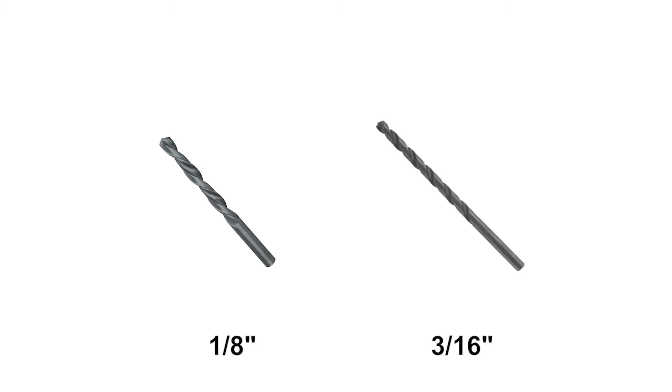and 3/16 inch drill bits, 3/16 inch hex wrench included with cable kits, cable gripping tool, optional, cable cutting tool, optional, cable release tool, optional, threading tool, optional, 90-degree threading tool, optional. Kits and parts for assembly:

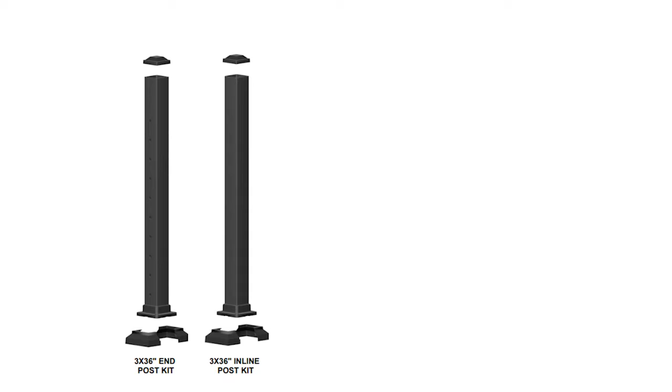3x36-inch end post, 3x36-inch inline post, 3x36-inch corner post, 3x42-inch inline stair post, 3x42-inch end stair post. Each post kit includes an aluminum post tube with attached base plate, post cap, and 2-piece base plate cover and an install guide.

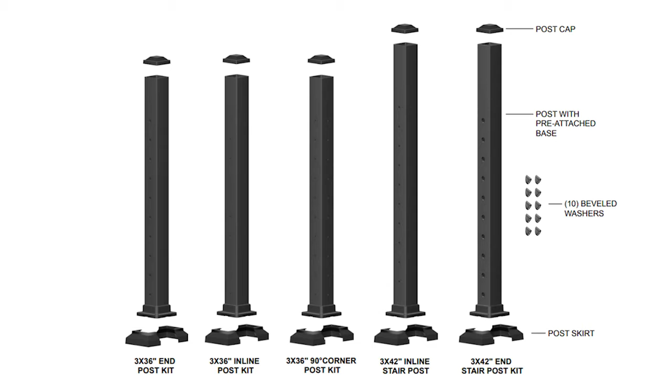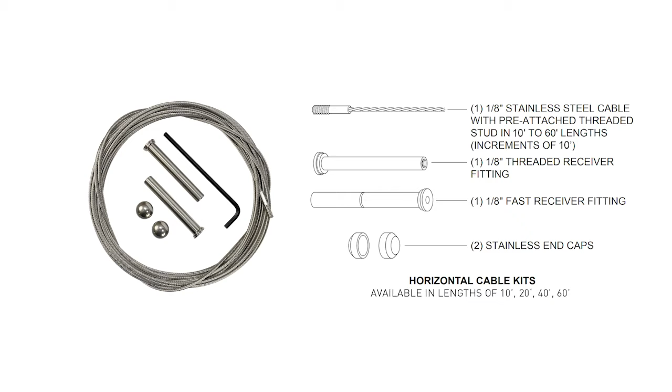3x42-inch end stair post kit includes 10 beveled washers, 1 1/8-inch stainless steel cable with pre-attached threaded stud, 1 1/8-inch threaded receiver fitting, 1 1/8-inch fast receiver fitting, 2 stainless end caps.

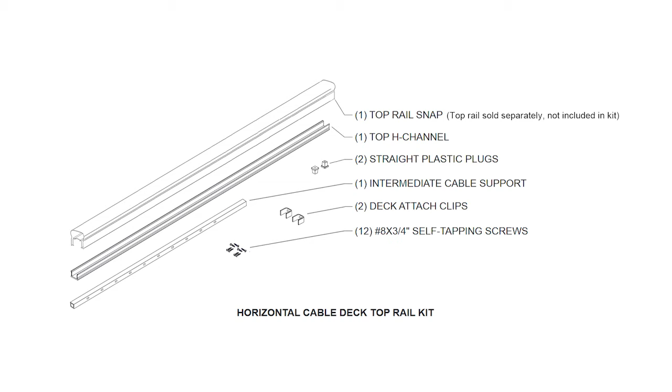Horizontal cable deck top rail kit: 1 top rail snap, 1 top H channel, 2 straight plastic plugs, 1 intermediate cable support, 2 deck attach clips, 12 number 8 by 3/4 inch self-tapping screws. Important notes: do not install base plate covers until railing assembly is completed.

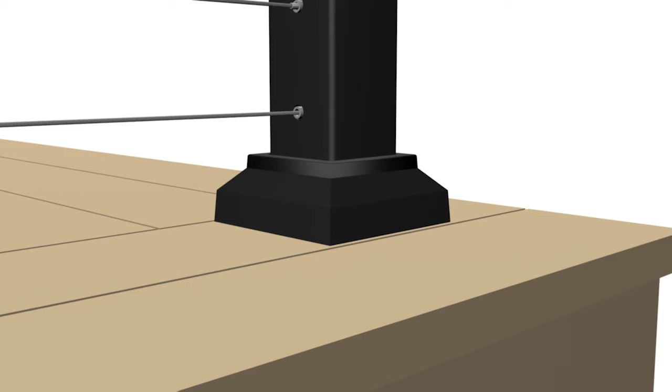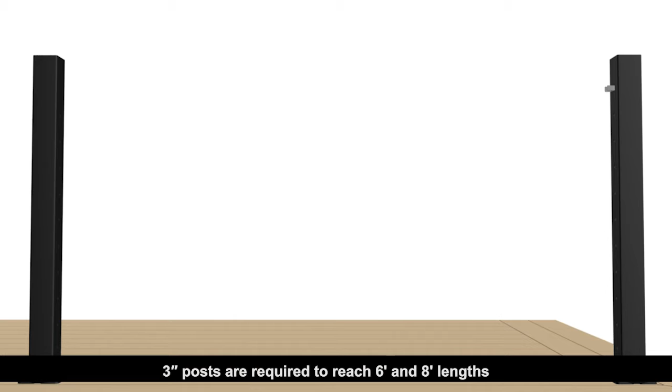Actual cable panel lengths: 69.43 inches and 91.31 inches. 3-inch posts are required to reach 6-foot and 8-foot lengths. Caution: if installing lighting, wiring must be installed prior to securing posts to deck surface and installing top rail snaps.

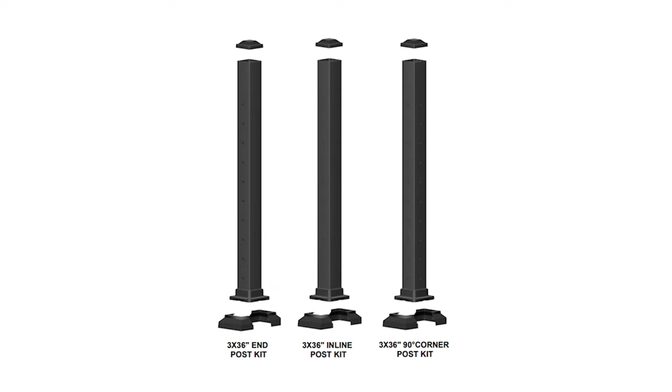Let's get started. First, we'll plan out and install the 3-inch aluminum posts. Determine necessary posts required: end, inline, or corner. Note: for structural integrity and proper installation, it is critical to use the correct railing posts in all locations. Corner posts are required for all 90-degree corners, and inline posts are required for all 45-degree corners.

42-inch stair posts are required for stair applications. Plan ahead for cables up to 60 feet in length and install end posts at the appropriate locations. Important: for 90-degree corner post applications, prior to installing rail attachment clips, ensure plastic plugs are installed in 2 pre-drilled hole locations. Leave plastic plugs in place until threading cable through corner posts.

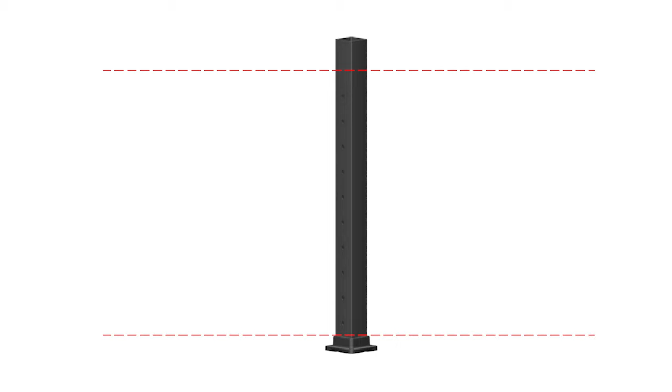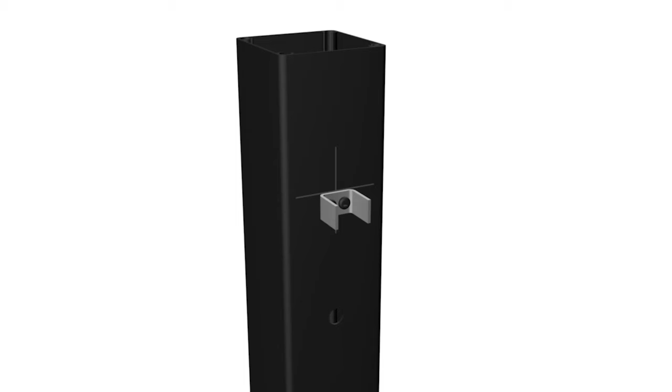Measure from the top of the base plate upper shoulder. Place a horizontal pencil mark at 33 3/8 inches for 36-inch rail height. Next, measure the center of the 3-inch posts and place a vertical mark at center of post. Install 1 upper attach clip per opening. Center 1 upper clip on pencil line. Secure attach clip with 2 number 8 by 3/4 inch self-tapping screws. Important: only install 1 upper clip per opening.

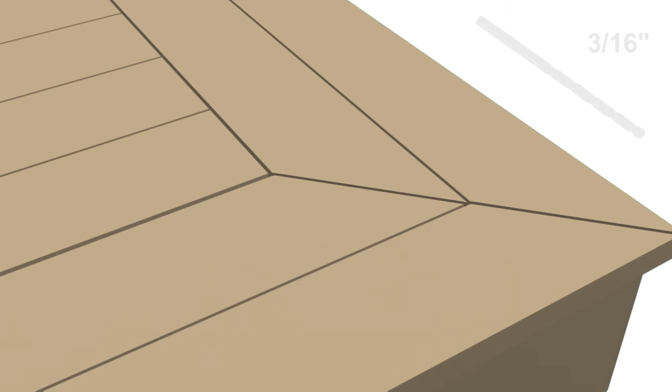Install proper post blocking. Use proper attachment screws or anchors as directed. Deck screws at each post location are not included with post kits. With 3/16 inch drill bit, pre-drill through deck boards and into blocking. Drill a 5/8 inch hole in center of 4 deck screw holes for lighting wires, optional. Level and plumb post using shims. Secure posts to deck with suggested screws.

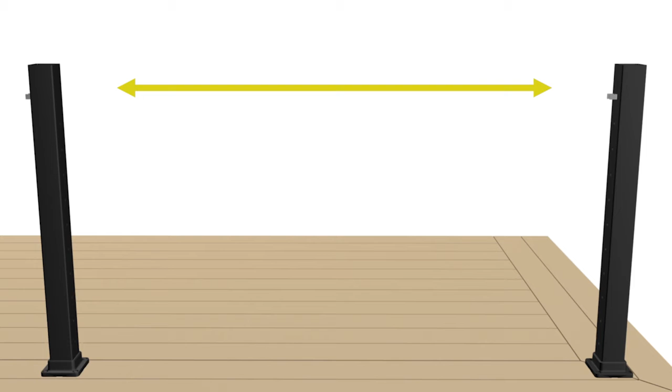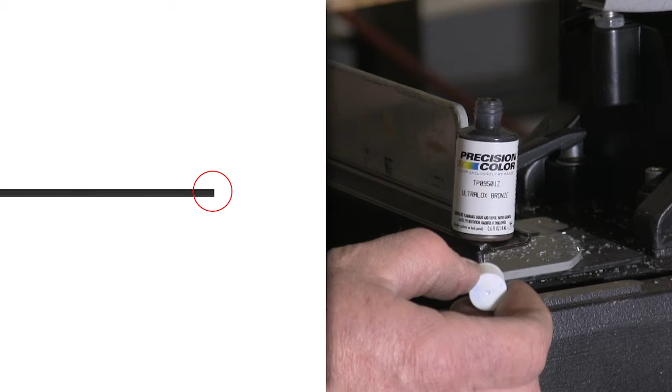Deck installation without bottom rail. Use only deck stair-top frame kits. Measure openings between posts and cut 1 U-channel per opening. Cut 1/16 inch less than opening size. Clean cut areas and apply touch-up paint on exposed ends. Measure and mark the center of top U-channel. Drill 1/8 inch hole in the center of top U-channel.

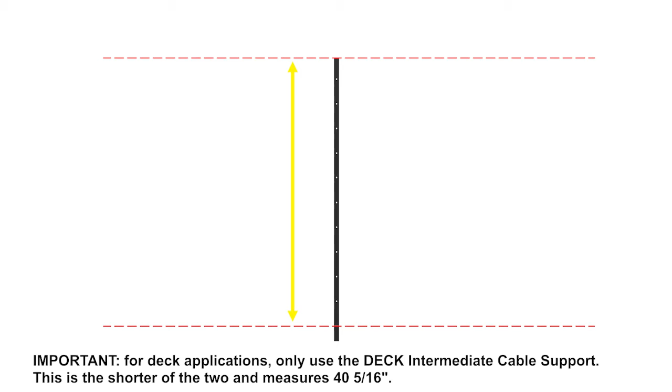Attach 3/4 inch by 3/4 inch plastic plug to the flat side of upper U-channel with one number 8 by 3/4 inch self-tapping screw. For 36 inch height railing, cut cable support to 34 inches. Important: only cut from bottom end of support, which can be identified by a longer section without a cable hole. Verify alignment of cable holes with posts before cutting.

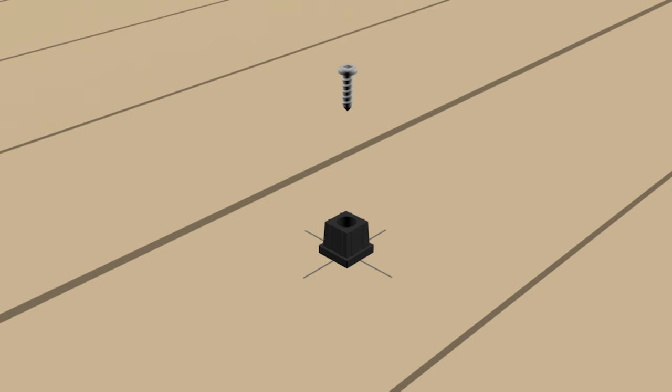Measure between posts and mark center point on deck surface. Attach 3/4 inch by 3/4 inch plastic plug to the deck surface with one number 8 by 3/4 inch self-tapping screw. Insert 3/4 inch by 3/4 inch intermediate cable support onto plastic plug, which is attached to deck surface. Then attach upper U-channel by inserting attached plastic plug. Again, verify alignment of cable holes with posts.

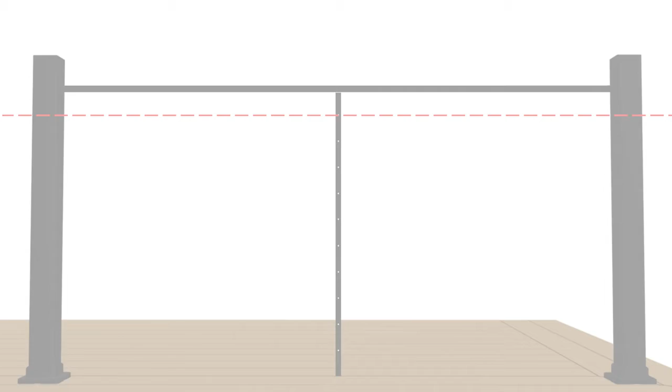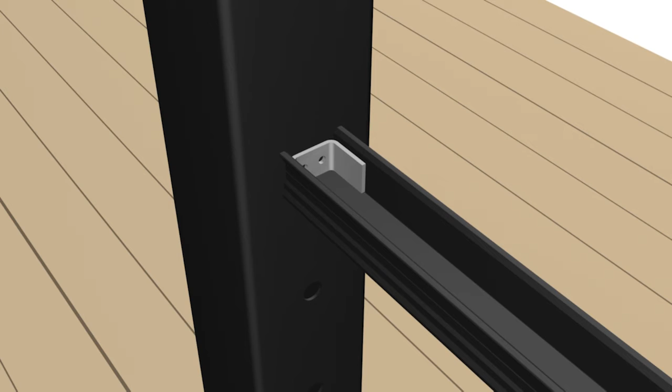Secure one end of U-channel to pre-installed upper channel clip with two number 8 by 3/4 inch self-tapping screws. At opposite end of U-channel, insert rail clip into U-channel. Align top edge of rail clip against prescribed pencil line. Attach rail clip using 4 number 8 by 3/4 inch self-tapping screws. Clamp or hold the top snap against posts and mark for cutting.

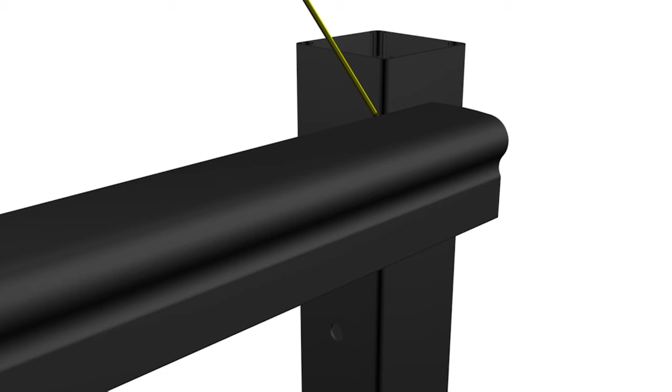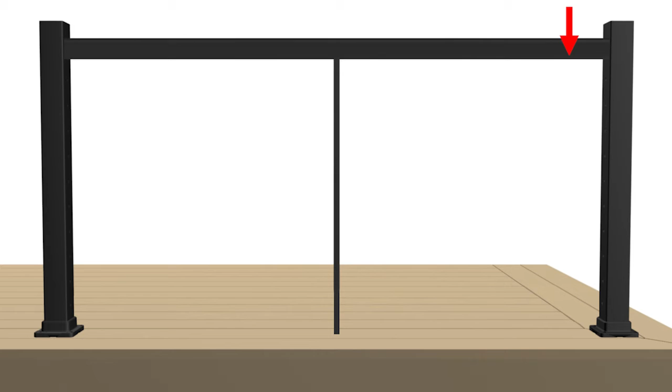Cut top snap 1/16 inch less than opening size. Clean the cut areas and apply touch-up paint on all exposed metal. Install top rail snap by pushing down on snap until fully seated on the upper U-channel. Helpful hint: apply downward pressure on top rail starting at one post and working towards the other post. Do not use a hammer to secure top rail.

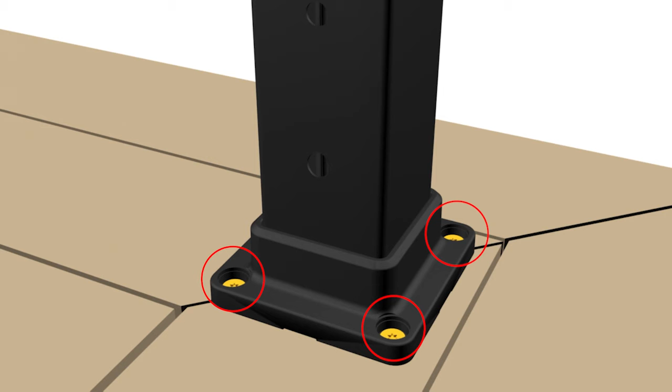Next, we'll install the horizontal stainless steel cables. Insert the threaded receiver fittings into the post. Note, if end post was installed too close to a house wall, it may be necessary to loosen post anchor bolts. Note, plan so that the threaded receiver fittings are at the starting point and the fast receiver fittings are at the bottom of stair run or the final post on the deck.

Cable runs cannot be longer than 60 feet. If railing is longer than 60 feet, an end post will need to be used to finish and start a new cable run. Thread the male swaged cable stud, attached to the cable, into the threaded receiver fitting, and turn 3 to 4 complete turns. Thread about 1/2 of the stud into the threaded receiver fitting.

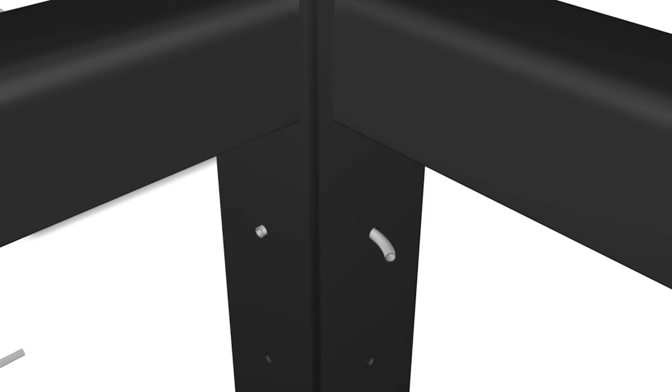Feed the bare end of the cable through all your intermediate cable supports and through the end post where you will be installing the fast receiver fitting. Corner post inserts allow for easy feeding of cable through 90-degree posts. Cable threading tools, straight and corner versions, are recommended for easy feeding of cables. When using the threading tools, push the cable through posts rather than pulling them. This prevents separation of the cable and tool.

Note: alignment plugs are installed in 90-degree posts to keep insert holes aligned. Do not remove plugs until cables are installed into empty holes. Rotate the fast receiver fitting clockwise as you push it onto the cable. If the cable begins to unravel, you are rotating the fitting in the wrong direction. Important: for bottom of stair runs, beveled washers must be installed to align fast receiver fittings with pre-drilled holes in post.

Note: it is normal to have trouble inserting the cable into some fittings. This occurs if the locking mechanism is already locked. To free it up, insert a cable release tool or other tool with 1/8 inch or smaller diameter. Larger tools may get locked in the fitting and become very difficult to remove. Push the fast receiver fitting along the cable and firmly into the hole in your post.

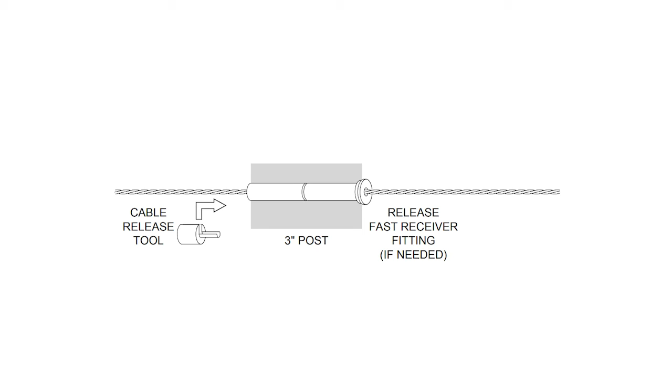While holding the receiver against the end post, pull the bare end of the cable to remove as much slack in the cable as possible. Important: inspect to ensure there is no slack along the whole length of the wire, especially around corners. If you need to remove a cable from the fast receiver fitting, slide a cable release tool onto the cable, then push firmly into the fitting. This will release the mechanism to pull the cable back out.

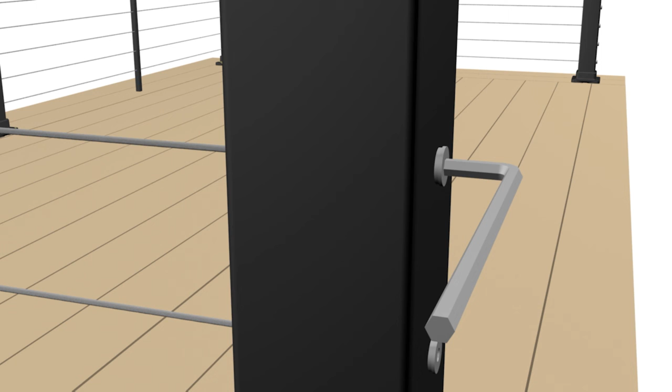Cut the cable flush with the hole in the back of the fast receiver fitting using a cutoff wheel. Go to the other end and tension the cable by holding the cable securely to prevent it from turning while you turn the threaded receiver fitting with a hex wrench. A cable gripping tool is recommended. Be careful to protect the cable from damage while tensioning. The male swaged cable stud will be pulled into the threaded receiver fitting by rotating the threaded receiver fitting clockwise.

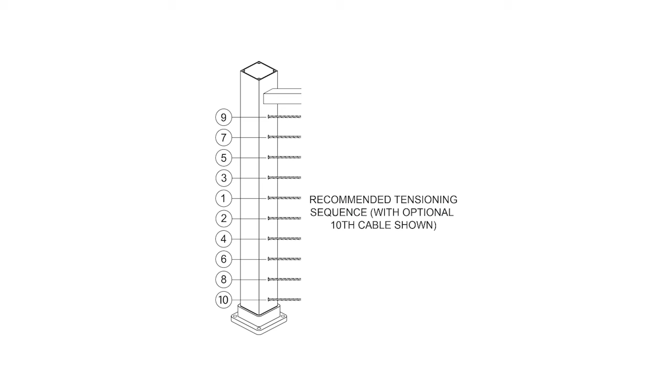Tension all cables in sequence, beginning with the center cables, moving up and down toward the top and bottom. As you tension each cable, give it a sharp pull downward mid-span to help set the wedges, gripping mechanisms in fast receiver fittings. Then re-tension as necessary in the same sequence. Be aware that the cable may move as much as 3/16 inch toward the tensioning terminal as the wedges seat.

Press stainless steel caps onto all fast receiver fittings and threaded receiver fittings. Helpful hint: spray window cleaner onto stainless steel caps to ease installation. Install post caps and post baseplate vinyl covers after railing assembly is completed.